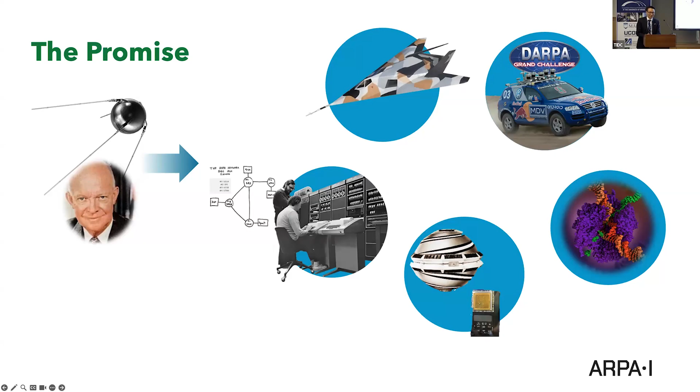Of course, the internet itself is probably the biggest thing that came out of DARPA, but also stealth fighters and things like miniature GPS, closer to the transportation sector here. The grand challenge and the other DARPA challenges really laid the foundation for self-driving and autonomous vehicles. 10 years ago, DARPA also made foundational investments in mRNA technology, which formed the basis for Operation Warp Speed and the vaccines we were able to develop very quickly.

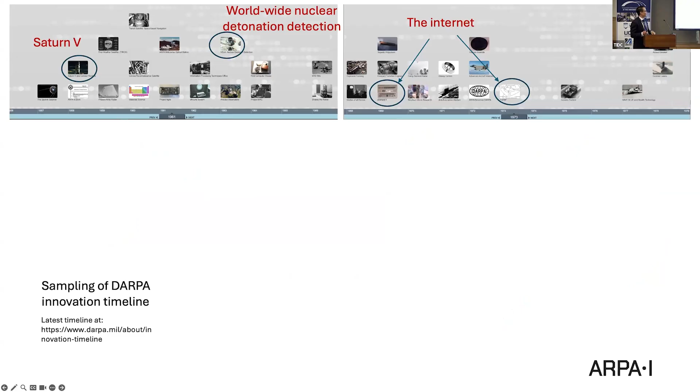If you're interested in learning more about DARPA innovation, there's a nice timeline - this is a slightly older version but you can find it on the web. If you look through that timeline and all the thousands of programs, these are the greatest hits: everything from Saturn V to worldwide nuclear detonation detection, the internet, the stealth fighter, miniature GPS, UAVs, Siri itself came out of a DARPA program, self-driving cars, hypersonics - just naming a few - and autonomous ships.

So one thing you might ask is, why should I listen to you to tell me how to set up a DARPA or how DARPA works? I had the fortune to work at DARPA for 6 years and to actually make this timeline, which is what every program manager wants to do. I was fortunate to lead some great teams to develop region-wide counter-WMD capabilities, working with state and local partners, and actually getting these nascent technologies from very low TRL to actual operations over that 6-year period.

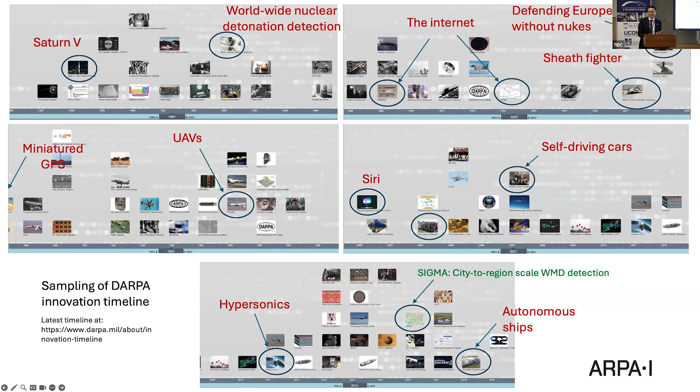So I'm a very strong believer in the DARPA model. I know it works, and I know that system allows us to take very nascent ideas that could be real breakthroughs and actually get them to operation in an accelerated time frame. So I'm very excited to have the opportunity to set up an ARPA-I for transportation. Ultimately, it's about this: ARPA-I is looking to accelerate the development of transformative transportation technologies that decrease costs, increase safety, enhance resilience, and make us more globally competitive.

Now let me tell you a little bit about how we actually do this. DARPAs and ARPAs - for those of you who work with them, you know they're quite different organizations within the overall R&D ecosystem. To be clear, DARPAs and ARPAs aren't everything. For a healthy R&D ecosystem, you need a broad range, but DARPA and ARPAs are a key part of a good R&D ecosystem. So some of the differentiation here is that, despite the fact that we are looking sometimes at very nascent ideas, these are ultimately agencies that are very problem-focused.

So for example, those long-term challenges I mentioned, we break those challenges down into problems that we set up programs to solve, right? And those problems could be really challenging, really hard.

The singular unit of work at DARPA is really the program directors and program managers actively managing metric-driven programs. Programs are 3 to 5 years, set up rigorously in terms of how you gauge success, so that if you're looking at a nascent idea that could have a large breakthrough, you can rapidly figure out if there's something here or not. If there is, scale it up, get it to prototype, transition it. If not, move and pivot to the next best idea.

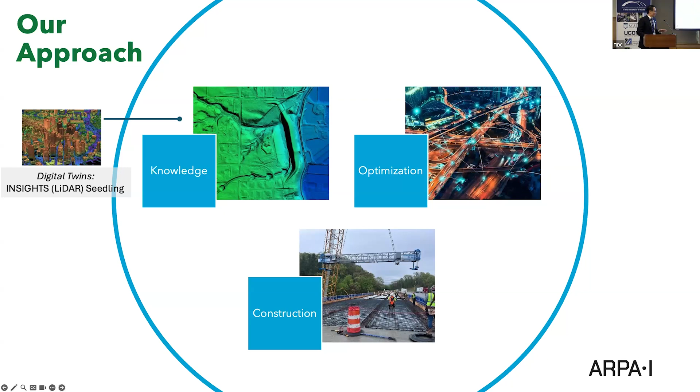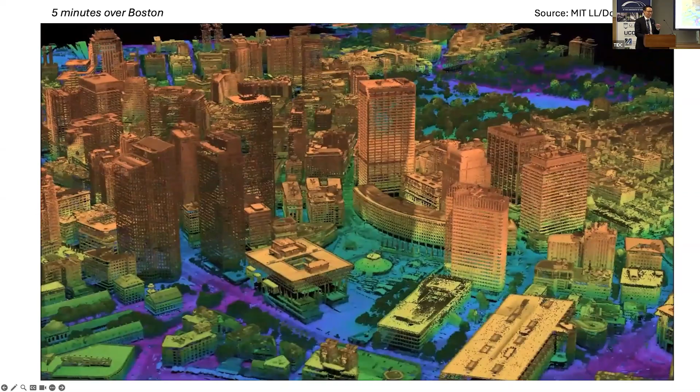One of the things we're leveraging is some very unique LiDAR technology that the DoD has developed over years. This is one of the most sensitive, if not the most sensitive LiDAR technology in the world right now. This is literally a model of Boston that was built from that platform over 5 minutes of aerial coverage. They flew over Boston for 5 minutes and they were able to build this whole model. So this, from a technology point of view at least, says we can cover very wide areas very quickly with that type of system.

Now, can we build on that technology and get it to a point that's cost practical? There's a corresponding discussion with AI on how to analyze that data, and that's what we're looking at too. So we'll be testing out some of those hypotheses under that seedling.

Under optimization, optimization is really about optimizing the systems of systems, that is our transportation infrastructure, and that's leveraging connectivity and autonomy to do it. So think about large scale traffic management over entire cities, doing it in order to reduce congestion, but also increase safety. Think about work that we can do to enable an autonomous vehicle ecosystem as well as advanced air mobility. Think about air traffic control for drones and eVTOLs - that's going to be very different than our current air traffic control system.

We're also working with DARPA, leveraging cybersecurity tools that they've developed over the transportation sector. So if folks are interested in that, please come talk to me. It's a really nice growing collaboration.

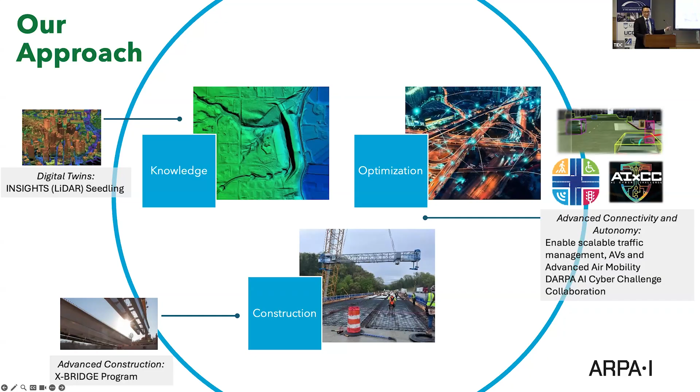And then finally, of course, construction, which is everything about advanced construction systems, but also about advanced materials. X-BRIDGE is our biggest program and our first program, and it's in this space where we're looking to develop technologies that can deliver bridges in half the time at half the cost while making them last twice as long. It's really great that we've been able to partner with the University of Maine as well as Maine DOT and other industrial partners here in order to make this program happen. So now let me turn it over to Kelley, who will tell you a lot more about X-BRIDGE.

I'll go ahead and do a quick introduction about Kelley. It's a great pleasure for Kelley now to be the program manager for the X-BRIDGE program. Kelley Stevens has worked as a civil engineer for over 25 years in the bridge and transportation industry. She's been out there for a long time, designing bridges, building bridges, working in different agencies. I'll give you an example of something she's done.

Her initial experience was with the Kentucky Transportation Cabinet for 10 years. She then moved from the Kentucky Transportation Cabinet to AASHTO, the American Association of State Highway Transportation Officials, where she worked as a program manager for bridges and structures and hydrology and hydraulics for the next 10 years. So she's no stranger to AASHTO and how AASHTO works. Within AASHTO, she worked to influence transportation policy as it applies to bridge design, construction, inspection, and preservation.

As well as oversee relevant changes to federally mandated codes and specifications and promote needed research. So if you're going to figure out how to go out there and get some new technology into AASHTO, you talk to Kelley. She's been out there doing that for a long time. We plan to do that with her and work with you all as an industry to bring new technologies into the AASHTO code. As an independent contractor, Kelley also was able to perform research through transportation funding arms and partner with several different universities.

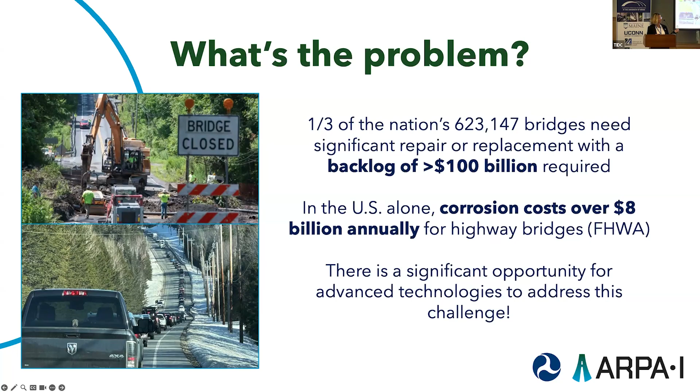So ARPA-I really has a significant opportunity here. This is a big problem, and we have an opportunity to use advanced composites technologies to address some of these challenges.

The industry has been looking for ways to do more cost-efficient designs for years, things like LRFD bridge design implementation or designing for a 100-year service life. We've been working on those efforts. We've also been working on how to cut down on construction time, how to get in, get out, and stay out. There are a lot of great new technologies in accelerated bridge construction out there. And we've spent a lot of research looking for new materials that deteriorate less quickly, are more resilient.

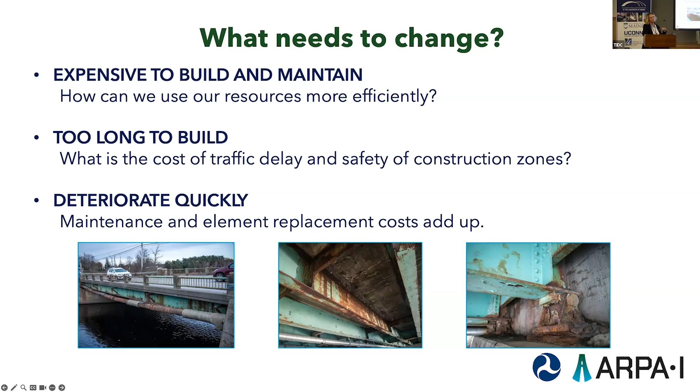What maintenance activities do we need to do? But still, we have the issues, right? We still have these challenges and we still have a need for change. So that's why we have X-Bridge.

X-Bridge aims to address those concerns, and we're going to leverage advanced composites and advanced system engineering to deliver bridges at, as Vincent said, half the cost, in half the time, with twice the lifespan. That is our goal. It might be ambitious, but that's part of the ARPA spirit.

So we're really happy to be working with Maine DOT, and part of this will be to build a full-scale prototype bridge within the next few years. We want to be able to engage and enable bridge owners to have these solutions to build safer, affordable, and reliable bridges. We think we're ready for a full corrosion-free bridge, ready to implement that technology.

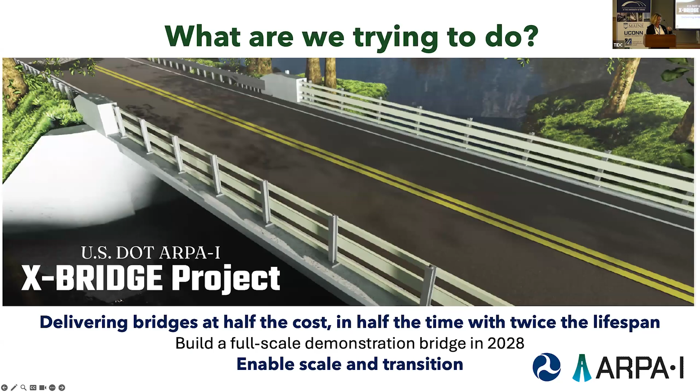I'm going to show you a few slides over the next few slides, some of the aspects of our vision for this X-Bridge. I think you may have seen some of these technologies before, some of them today. Habib's already talked a little bit about some of them. But our approach is to use all of these innovations, in addition to improved and optimized manufacturing techniques, to really reach these goals. So this might look like a typical bridge cross-section to you, but there are many innovations throughout.

We're looking here at a basalt fiber reinforced deck, which allows for a corrosion-free option, as well as reducing the need for a larger amount of rebar. Continuing with that corrosion-free material theme, we're using FRP rebar as well in this deck.

At the same time, underneath the deck, we're going to investigate the advantages of arching action to minimize overall concrete and reduce the cost further. The arching action is achieved through these stay-in-place FRP arching deck forms.

Continuing with the corrosion-free superstructure, X-Bridge will investigate several types of FRP composite girders. This might look a little bit familiar - you saw the girders earlier in Habib's pictures. We're going to be looking at optimal manufacturing techniques and material properties, and also geometric design.

So this will result in a system engineered, corrosion-free, FRP composite, cost-efficient superstructure. This is a concept that we believe could really change the future of bridge design, as well as the manufacturing and construction of the composites industry.

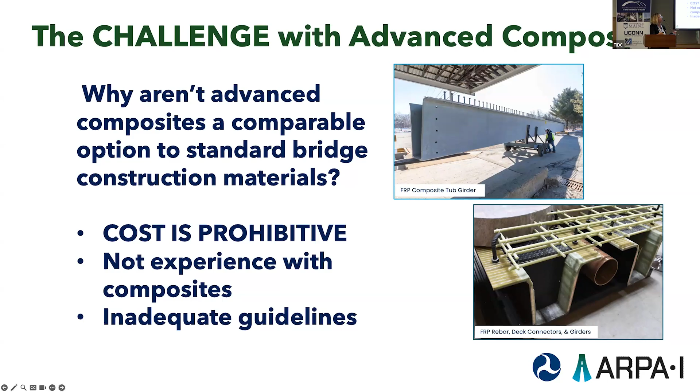So the X-Bridge project believes that bringing down that initial cost of advanced composites is really the catalyst for acceptance in the community. X-Bridge is going to work to bring down those costs through an integrated approach. Systems engineering will lower the initial cost of the advanced composite girders through a full interconnected program that goes from testing to prototype, and includes optimizing materials, design, and construction processes.

To add to that, we'll be looking at efficient, scalable manufacturing processes using innovative new materials and techniques to reduce costs through less labor. We'll partner with Maine DOT throughout the project, and then we will be working to build a 75-foot bridge prototype in Maine.

And this will help us determine the needs of the bridge owners. We really want to listen, hear how we can work with the DOTs, and this will give us that experience and feedback that we need to be able to move this forward.

And it'll also give an example to other bridge owners who want to use these technologies in the future.

And lastly, we'll use our research results and lessons learned from our partnership with Maine DOT and other industry leaders to develop specifications and guidelines to help the technology transfer, making this composite usable for all bridge owners. We're looking forward to working with other state DOTs on this as well throughout the process. So please talk to me more, we need all the input we can get here.

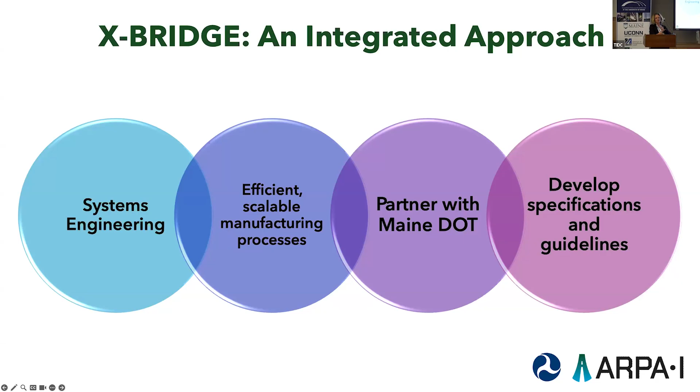So just to give a little bit more detail on the goals of reducing manufacturing costs and defining optimal materials, we'll be looking at ways to automate processes that are currently labor intensive. For instance, automation of fabric placement.

In addition, we will investigate continuous production methods, determining if pultrusion is a viable option for manufacturing bridge girders. And we'll investigate a variety of material and manufacturing options for thermoset and thermoplastic processes, such as thermoplastic rebar is one area we'll be looking at. And we'll also be looking at basalt as a novel fiber for use in the composites.

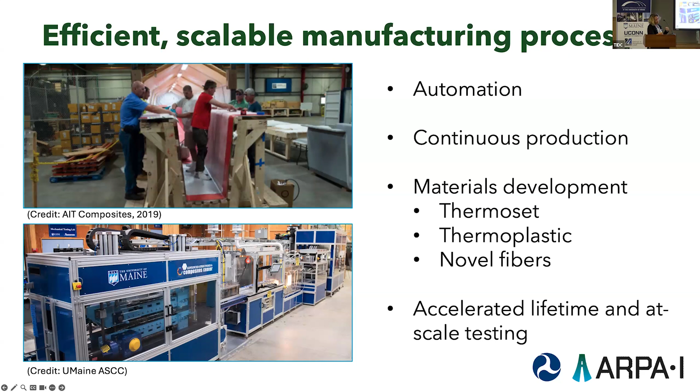Lastly, we're going to develop—University of Maine will be doing accelerated testing and at-scale testing of the bridge components and the materials to prepare the way for the guideline and specification development.

In addition to looking at the cost savings with manufacturing, we've also done the work to determine if these solutions are actually going to result in cost savings throughout the bridge life cycle. In our initial life cycle cost analysis, we found that if we're successful, we can expect to achieve a completely composite bridge superstructure with initial costs that are 15% less than that of conventional bridge materials.

And when we take into account an expected 150-year service lifespan of these composite bridges with minimal maintenance because of the composites, and less need for deck repairs, less need for deck replacements, less need for maintenance activities in general, then the overall life cycle costs become less than half of that of a conventional bridge.

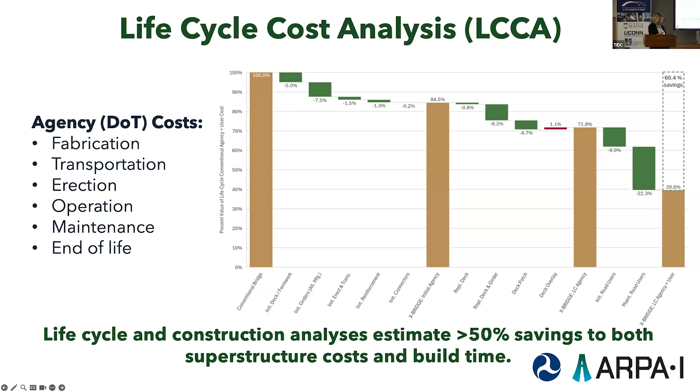So finally, we're already working, as I said before, with Maine DOT, and we're really grateful to have that opportunity. We will be working with them to select a site for the 75-foot bridge prototype with a goal to begin construction on this prototype bridge within the next 3 years. And the prototype will provide an example for bridge owners that are interested in implementing these type of composite girders.

One of the things that I was often asked at AASHTO was, what are the other states doing? And so that's often something that everyone wants to know. Are they doing this? Is it successful? How is it working out for you? So that's one of the things that we'll be able to do as we build this bridge with Maine DOT.

In parallel with that prototype design and construction, we're going to work to develop those needed specifications and guidelines with organizations like AASHTO. I know University of Maine has worked with them, worked on these type of guidelines before, and we'll be working with them to develop the needed guideline specifications so that everyone can use this technology.

So the real success is going to be measured by the community acceptance, and by the implementation of these corrosion-free full composite superstructures.

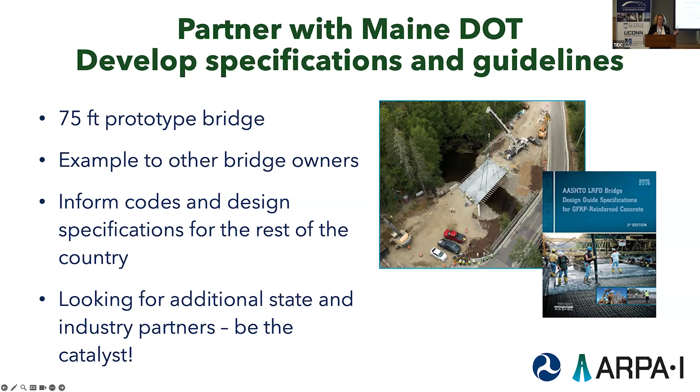So we want to hear from you. We are here to listen. You, I think, are going to be the ones that are going to move this forward. You are going to be the catalyst for us to keep moving forward and get acceptance. So be the catalyst. That's why we're all together here today, I think, to really get excited about these opportunities and move this forward.